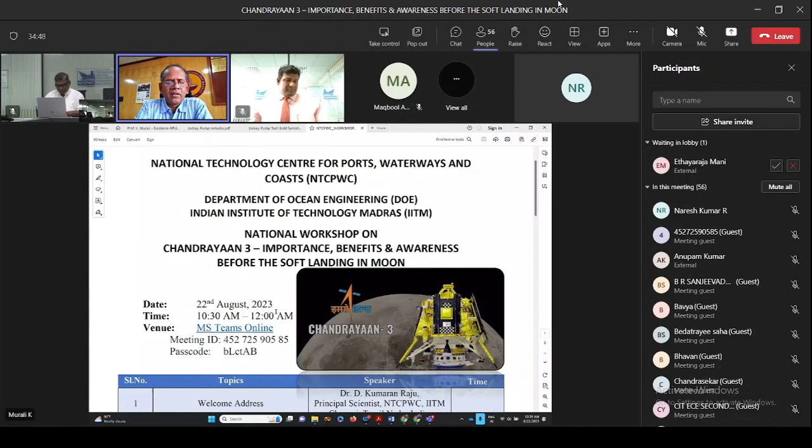We are collaborating in this effort with the Sagarmala program of the Ministry of Ports, Shipping and Waterways. We also thank the ministry and the Sagarmala team for having helped us organize this workshop on the occasion of the Chandrayaan 3 landing on the moon.

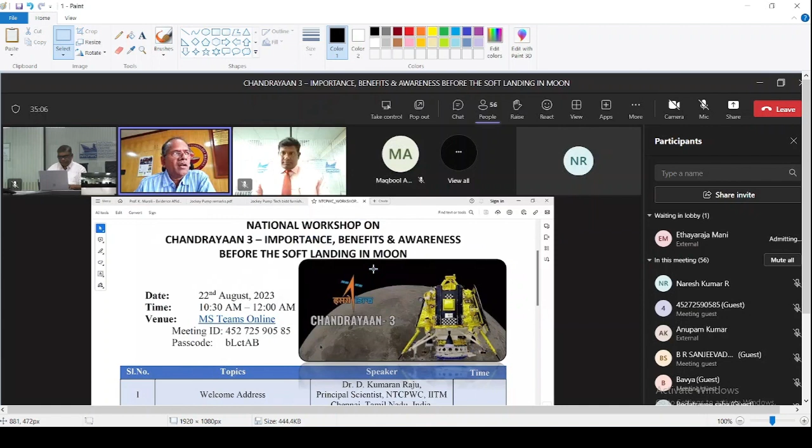There has been very little research that has gone into the science of the moon as a celestial body, and therefore we thought we would capture whatever research has gone into studying the celestial body in the country so far, along with information about the technological side of the program—the technologies directly involved, and those indirectly involved in this particular project and in further efforts.

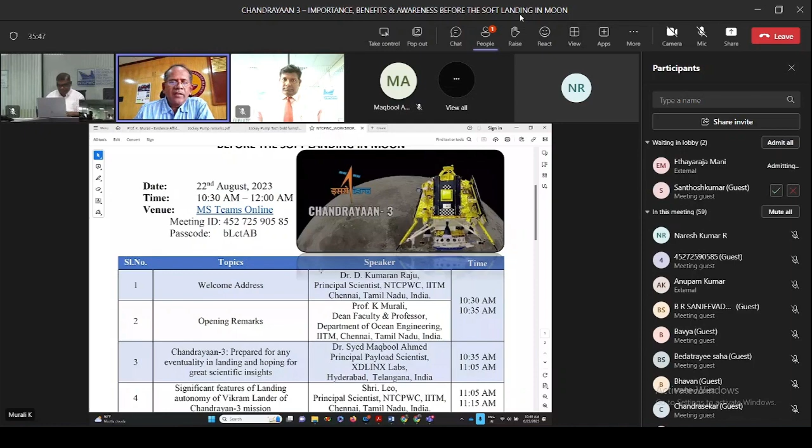In this context, we have invited three speakers. One is Dr. Syed Maqbool Ahmed, Principal Payload Scientist at XDLINX Labs, Hyderabad, Telangana, India. He will be talking about the Chandrayaan 3 project, the preparations they have done for any eventuality in landing, and the hope for great scientific insights. This is the topic on which he is going to deliberate.

We will also hear from Mr. Leo, Principal Scientist, NTCPWC, IIT Madras, on the significant features and landing autonomy of the Vikram lander of the Chandrayaan 3 mission. We will then hear from Professor K. Muthukkumaran, Department of Civil Engineering, NIT Trichy, Tamil Nadu, who has been instrumental in carrying out key projects on the geology and structural aspects of the celestial body. He will talk on lunar soil simulant for Chandrayaan missions, covering rover-soil interaction and the geotechnical properties and aspects relating to strength and stability.

With that, we will be winding up this program at around 12 o'clock.

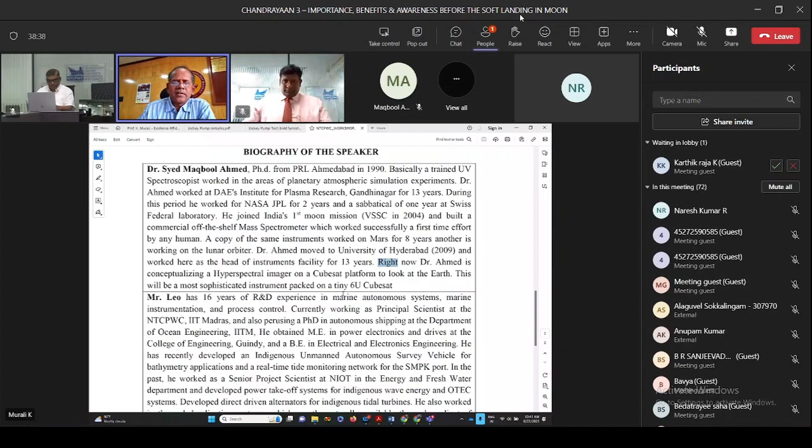A brief introduction about Mr. Leo. Mr. Leo has 16 years of R&D experience in marine autonomous systems, marine instrumentation, and process control. Currently working as a principal scientist at NTCPWC IIT Madras, and also pursuing his PhD in autonomous shipping at the Department of Ocean Engineering, IIT Madras. He obtained his ME in Power Electronics and Drives at the College of Engineering Guindy, and BE in Electrical and Electronics Engineering.

He has recently developed an indigenous unmanned autonomous survey vehicle for bathymetry applications and other surveillance applications in various water bodies. In the past, he worked as a senior project scientist at NIOT in the Energy and Freshwater Group, and developed power takeoff systems for indigenous wave energy and OTEC systems. He has also developed direct driven alternators for indigenous tidal turbines.

He has also worked in thermal desalination systems, which use naturally available thermal energy in order to produce clean water. He has a patent granted in desalination, and 3 published patents in autonomous survey vessels, hydrokinetic turbines, and wave-powered navigation buoys.

Finally, we will be hearing from Professor Muthukkumaran. Professor Muthukkumaran is currently a BA Chair Professor at National Institute of Technology, Tiruchirappalli, India. He obtained a PhD in Soil Structure Interaction and Marine Geotechnical Engineering from the Department of Ocean Engineering, IIT Madras. He has published more than 200 papers in international and national journals and conferences.

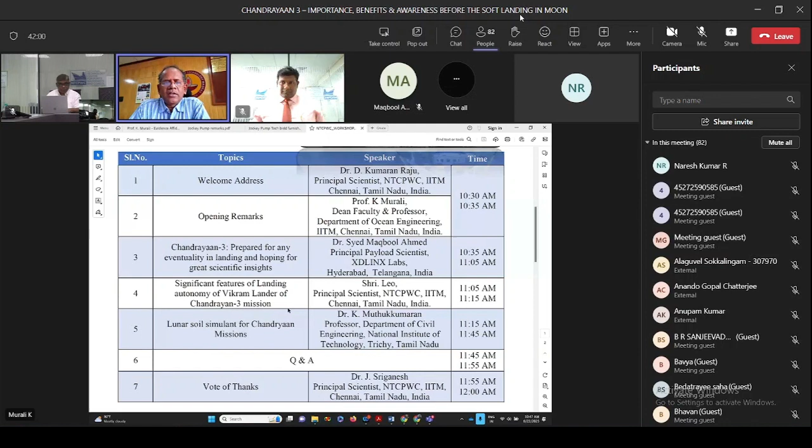I introduce all the speakers upfront because this sets the context that we have the most relevant speakers in this part of the country for this particular workshop, and we are very happy and honored to have them here. So we will start with the first presentation from Dr. Syed Maqbool Ahmed on Chandrayaan 3, prepared for any eventuality in landing and hoping for great scientific insights. Dr. Ahmed, please take over from here.

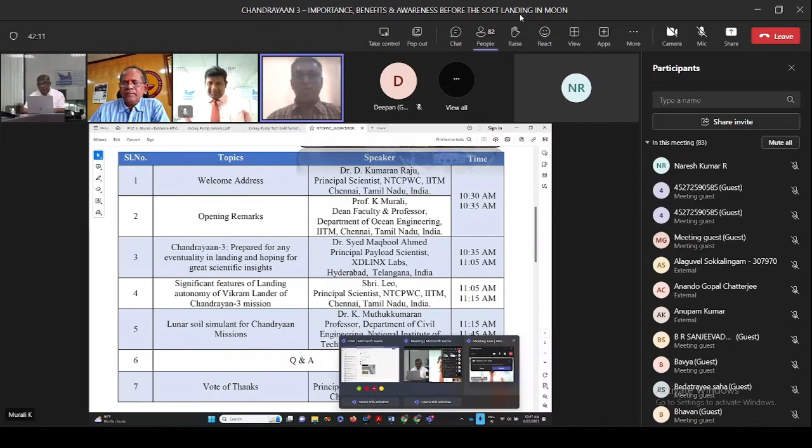Thank you, Professor Murali. I would like to thank the organizers, IIT Madras, and especially Dr. Sriganesh, because of whom I have come to this platform. This is a great opportunity to interact with people from various walks of life. I'm really excited and I really look forward to giving this lecture. I have roughly around 20 to 25 slides, and I expect to finish them within half an hour. I would be very happy to answer any questions after my presentation.

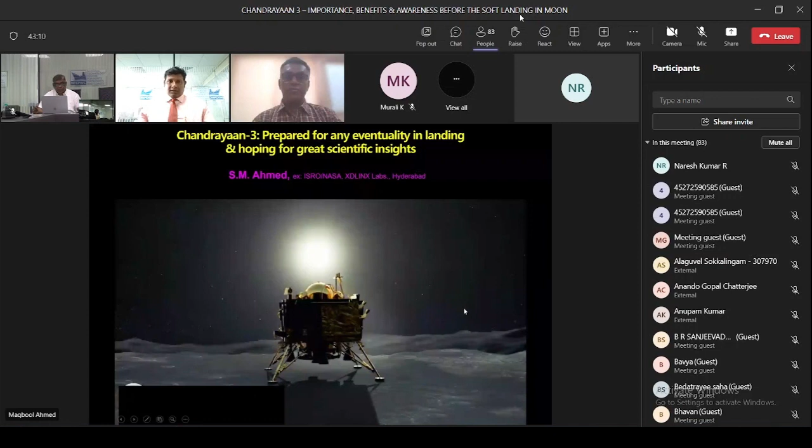So if you permit me to share my screen, I would go ahead and share my screen. I'm doing it, thank you, and it's coming up. I go here, yeah, it's here, and hope it's... is my screen seen? Yes, it's visible, sir. Please go ahead. Okay, thank you, sure.

So roughly what I plan to do is spend most of the time on Chandrayaan 3, in particular the landing aspect. A couple of 4 to 5 slides will be about how uniquely Chandrayaan 3 the people at ISRO have prepared for any eventuality, as I use the phrase, and that's what the chairman of ISRO has mentioned.

So most of my presentation, that is almost 50 to 70%, is based on Mr. Somanath's presentation, his lectures in the past 1 month. He has gone on record to give an extraordinarily clear-cut explanation about how exactly we are going to land.

And of course, the later part would be my part, where being an instrument scientist and having worked in Chandrayaan 1, I would speak about what these instruments are capable of.

So let's start off. This is the GSLV Mark III in a new avatar. They are calling it Launch Vehicle Mark III, M4 is the version. No point in going into the details of the rocket, but I would just like to touch upon a couple of aspects. The first few slides are kind of a popular level for the very young students who have joined.

The press called it Bahubali. This is one of the very powerful rockets, GSLV Mark III. And this, please don't worry about 11.2, this is the escape velocity. It will go maybe around 4 to 5 kilometers per second in very little amount of time.

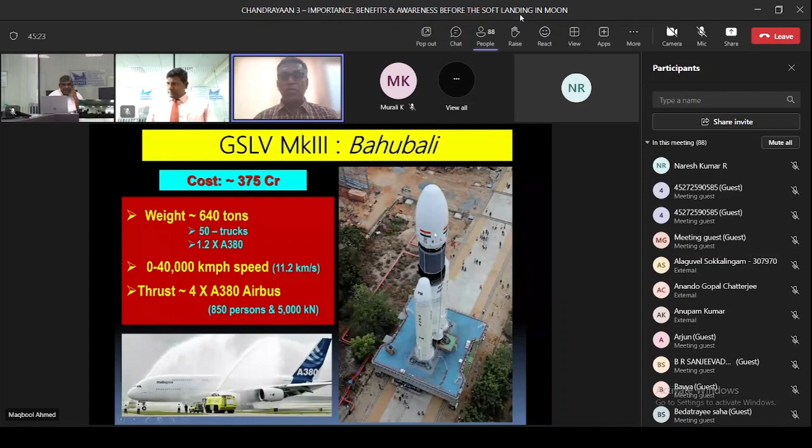It stands almost 11 to 10 stories tall. Look at the perspective, I just counted the floors, it really goes up all the way. That needs to be pushed right into the atmosphere, put in proper orbit and all. It's a huge, humongous task on the part of rocket scientists in ISRO.

But I would not touch upon these. I just like to show you the nose cone, which is actually carrying the spacecraft itself, so large, 4 to 5 stories tall. You assemble everything together and you expect it to go into a perfect, what they call a textbook launch. It requires enormous amount of experience and hardships, and if anything, one particular connector goes bad, your mission is all finished. Just one connector.

They have a few thousand connectors. They have a few kilometers length of cables. So anyway, that's a huge task.

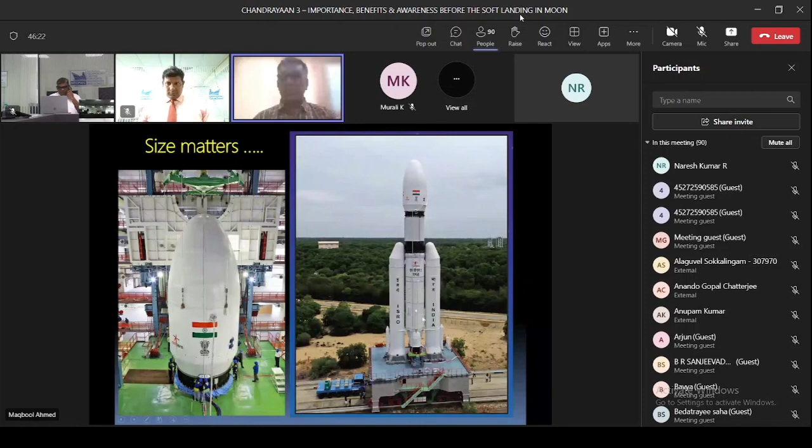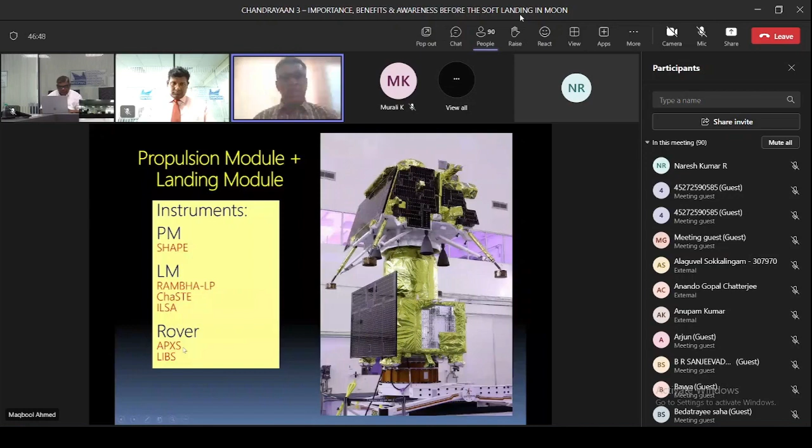So this is all what actually is left for the Moon, which is a propulsion module carrying the landing module. So these are the instruments. I'll come back to the propulsion module, which has one instrument, one payload, and the landing module has got 3 or 4 instruments, and the rover, which is in the belly of the landing module, the Pragyan rover, has 2 instruments. I would touch upon this in the last part of my presentation.

Now, everywhere at the bottom I have given credit to Mr. Somnath, chairman of ISRO, since the slides are all from his presentation. He has gone into extreme details. I don't want to go into the extreme details, even though I have understood them. I can really discuss, but since I've got to finish everything in half an hour.

So the actual mantra, since I'm talking to the people at IIT Madras, is guidance, navigation, control - the GNC, which is a solid amount of work that's going to work tomorrow. So what they are going to do is they have come up with a fantastic guidance algorithm. Before you pay attention to this table, please ignore this.

So in a very smiling way the chairman said that this time we are not trying to land successfully. Please listen to this phrase - he said we are not trying to land successfully. Our mantra is to rule out, to mitigate every failure mode, and that's a huge task. What the chairman is saying is that last time we tried to land successfully and they landed in trouble. Maybe later at the end of the presentation, if somebody asks the question, I'll tell you - if you try to land successfully, you can ask for trouble. Whereas solving every possible failure mode requires an enormous amount of hardship, and they have gone through it.

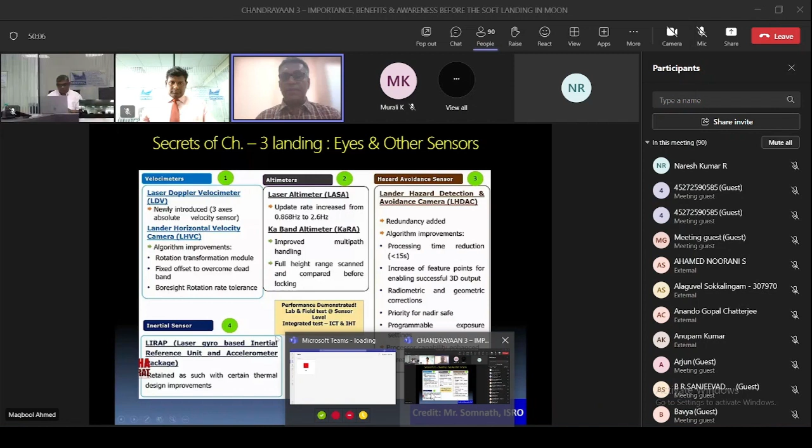Now, I wish I could go into the details of all this. I would not bore you with it all, but I want to impress upon you the amount of sensors they have plugged in. They have laser Doppler velocity meters, altimeters. In Chandrayaan 2 also we had both laser-based and Ka-band based systems - various types, this is a kind of redundancy.

If something doesn't work, they make sure there is correlation checked between systems, so that if something fails, the other one works as a backup. In the hazard avoidance sensor, they have a huge amount of cameras - not one, more than one - and a huge number of program modes where they process and make sure the path they're following is correct and will take them to the given target.

And then inertial sensors - they have this fantastic laser gyro-based inertial reference unit and accelerometer package, which has 3 to 4 sensors, state of the art. It's all built in, and these are part of the landing module - the eyes and other sensors in the landing module tomorrow.

So just to tell you what exactly the mission is: you follow the real-time guidance bound check, make sure everything is going smoothly in real time. If any violation takes place, let it take place - you deviate, and that leads to real-time retargeting. So don't worry about the target you're going after, go for another retargeting.

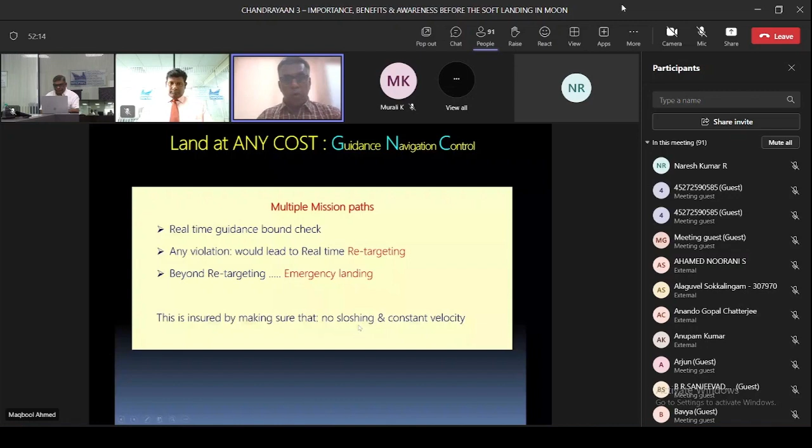Yeah, a little bit more - I hope I'm not boring you too much, but these are absolutely the numbers and actual spot-on issues which they have addressed, and they have made sure this will work as compared to Chandrayaan 2.

As I told you, the mantra is to mitigate expected failures, not just to land successfully - don't worry about landing at the precise spot. Instead of a half-kilometer by half-kilometer target last time, which ran into problems, now they've gone for a better strip, which is 4 kilometers long and 2.5 kilometers wide. Not one, there are 3 strips they have identified, so this is much easier - just like a huge military transport aircraft, like an Ilyushin 76, that can go and happily land.

It is a sequence to tackle, as I told you - sensor failure, engine failure, algorithm failure, and calculation failure. These are the phrases I used from the presentation of the chairman himself, not my own phrases. So it's all there - land anywhere instead of at a single spot. A huge addition has been made - they've added one more extra camera, and one extra antenna to make sure communication takes place in a robust way.

Lots of solar panels, additional solar panels all around the lander, so that even if the landing takes place in an odd way, you are facing the sun and extracting good amount of energy to make your experiments go. And Doppler velocity monitor, a very crucial sensor, just to make sure constant velocity, and if everything else fails, the DVM will take you happily to the spot of your choice.

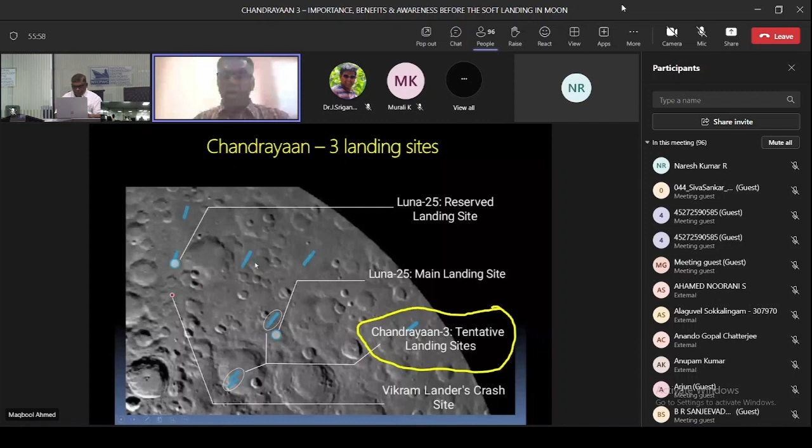Now, a crucial test they did. So I'm almost 30% through my presentation. I've got another 8 slides.

So the crucial cold and hot test they did, following ISRO's mantra - what is that? Seeing is believing. They said, sir, we will do the test, sir, then only we will say that things are working. What is it? Cold test. They assembled the whole Vikram and took it in a chopper, and all those 9 sensors I told you, all of them are put to use. Let's see whether the velocity meters, altimeters, camera - they are all working.

Is the camera trying hazard avoidance detection and taking it to safer places? Camera working? Yes, the camera is working. Altimeters, all the altimeters were tested. I'll show you the pictures also, which the chairman showed.

Hot test. What they did was, from a huge crane, they let the Vikram lander actually come down and simulated the weight also, which is 1/6 of what it is on the surface of Earth. And they made sure that the engines are firing beautifully well.

So this is like I give you a racing horse. Now the question is, can you control the racing horse? That's very important. 740 newtons is a huge propulsion engine. So they made sure that the propulsion is very, very nimble. It's like a very powerful horse, but it's listening to all your controls. They're throttleable, so that is your control, which is the leash in your hand.

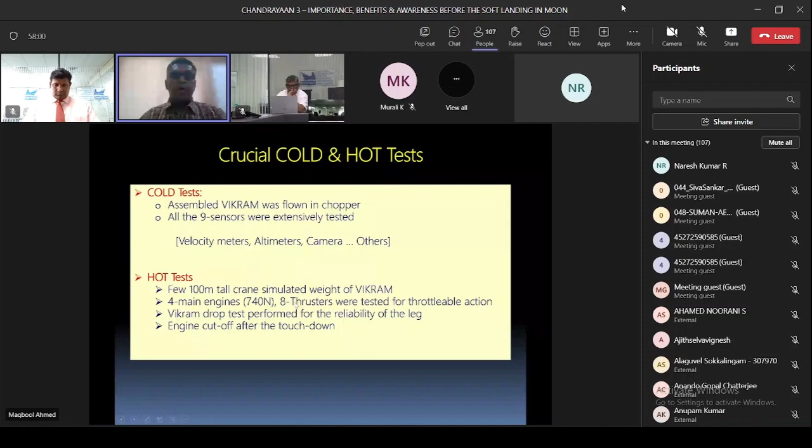So ILSA is actually a moonquake measuring 3-axis accelerometer with excellent resolution of 10 nano G. The G value, gravitational pull of the Earth, almost 10 raised to minus 9, minus 7 G resolution. Fantastic, built right here in India, starting from scratch.

And RAMBHA is electron density, or the charge, the dust which was actually caught on the astronauts and all in the Apollo mission. They wanted to check in a region of almost 25 picoamperes equivalent current to 25 microamperes current. They also want to see how this dust charging is taking place as the sun rises and as the sun sets. First time, nobody has ever tried, and ISRO has.

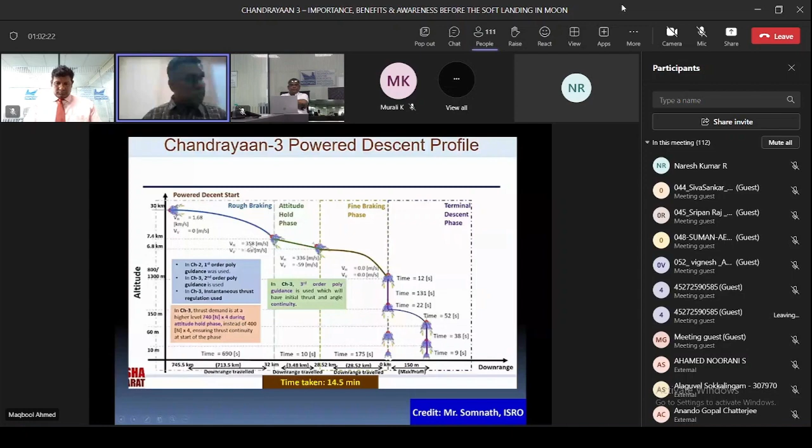ending in 11 minutes or so, 690 seconds. They will end up with a velocity which is again reasonably high, which I've calculated at 1,300 kilometers per hour. Now again they hold the altitude hold phase. They make sure that it will not stumble, but still try to retrofire and bring down the speed from 1,300 to almost 200 kilometers per hour at this stage. So from here it is again almost retrofiring.

Then from horizontal, by virtue of thrusters, they will make sure that it is vertically above the lunar surface. Then it will have a lot of fuel to nicely hover for these many seconds, happily make sure that it looks for that nice strip and moves around from point A to B to C, and then lands on that beautiful 4 kilometers by 2.4 kilometers strip.

And all the details which I explain, all of them are there. Plan A, plan B, plan C. Plan C fails, close your eyes, happily go and land here. That is what is going to take place. And imagine how terrible is the place where Chandrayaan 2 tried to land. We are going to land somewhere here only, which I showed you there. So it's just like the eagles are daring to land there.

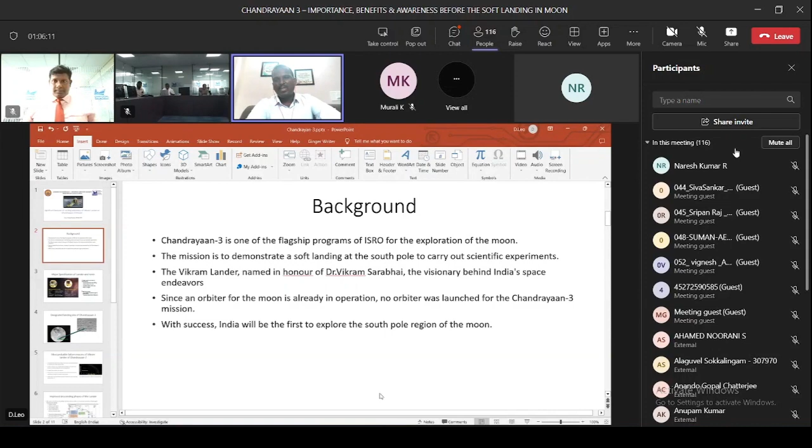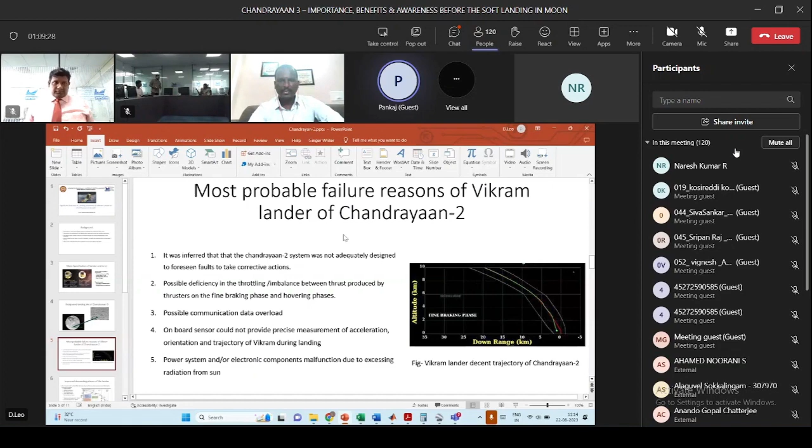So now I'm sharing the screen. The Chandrayaan 2's power system and its electronic components malfunctioned due to excessive radiation from the sun.

So the improvisation taken in the next mission: after descent orbit insertion (DOI), the below phases will be executed autonomously on finalizing the trajectory for landing. There are multiple descending phases: rough braking, altitude hold phase (hovering), fine braking phase, and the touchdown phase, which is the terminal descent phase.

The total descending duration is less than 15 minutes. The horizontal distance during the descending operation is approximately 750 kilometers. The descending altitude was initially 30 kilometers, but we recently achieved 25 kilometers.

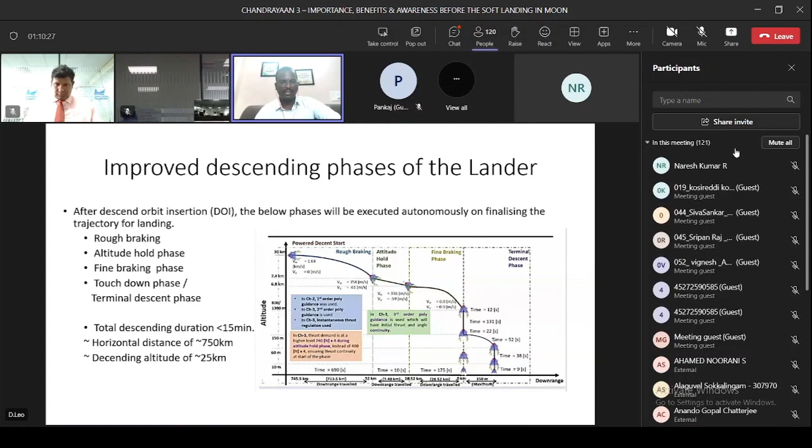So it has to reduce its altitude from 25 kilometers.

So the improved features on the Chandrayaan 3 lander include a terrain relative navigation system that uses onboard cameras. There are multiple cameras, already explained by the first presenter, and lasers to map the landing area before descending. This also helps identify obstacles.

The earlier mission, Chandrayaan 2, had first order poly guidance. Now it has been improvised to second order poly guidance that uses terrain relative navigation data to guide the lander to a safer landing spot.

This now has indigenous thrust regulation—instantaneous thrust regulation—so it can take much faster regulations in the thrust.

It is possible now. A backup landing system: if the primary landing system fails due to unforeseen situations, then the backup landing system present in the lander will take charge. Also, increased fuel capacity.

So at present we have a good amount of fuel to take up multiple attempts during the descending. We have now reinforced landing legs to protect the lander from damage.

These are all the lessons we have learned from the Chandrayaan 2 mission. So most of the improvisations are learned from the past mission.

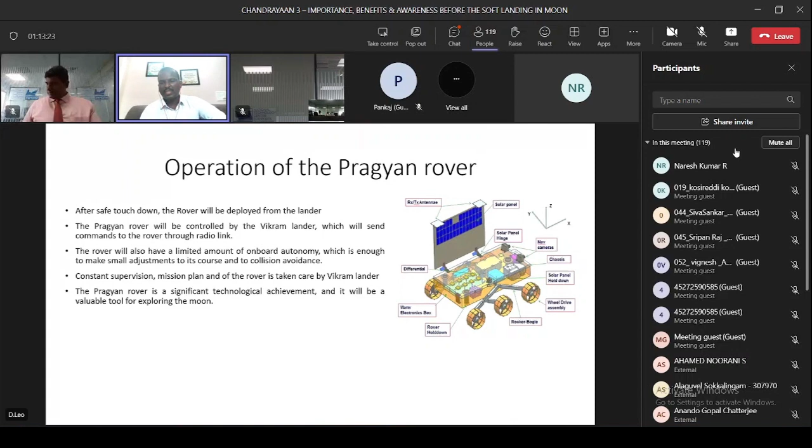The constant supervision and mission plan of the rover is taken care of by the Vikram lander. The Pragyan rover is a significant technological achievement and will be a valuable tool for exploring the moon, with a good amount of sensor payload for scientific exploration once deployed.

In conclusion, the lander is scheduled to touch down tomorrow at 6:04 p.m. Let's hope to celebrate its successful touchdown together. Thank you. Jai Hind.

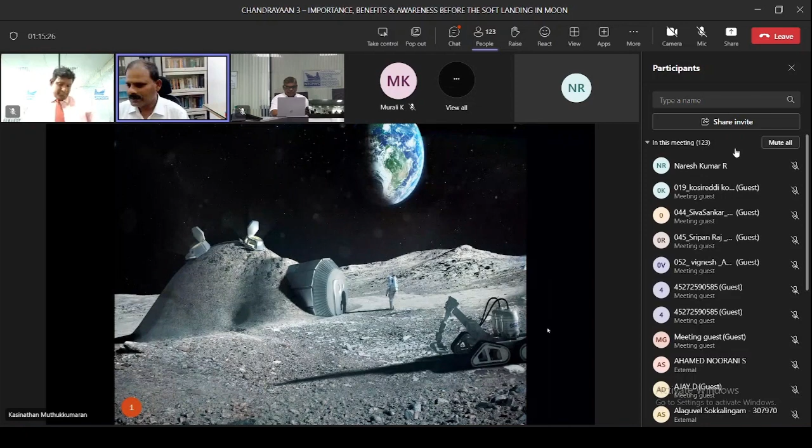At the outset, I really thank IIT Madras for giving me this opportunity. We have been working on the Chandrayaan mission for the past 13 years, so to cover the entire research work we did in the last 13 years in 30 minutes, I will nevertheless try to focus completely on a few important aspects related to lunar soil simulant and lunar structures.

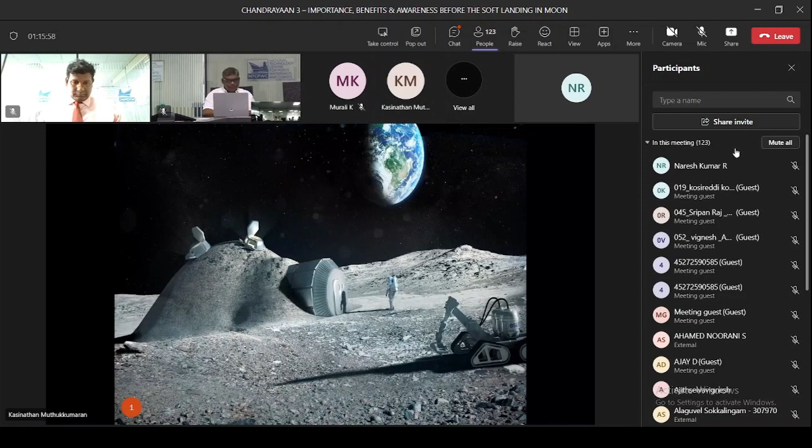So my topic is lunar soil characterization and design of lunar structure for Chandrayaan missions. I'm Professor Muthukkumaran from NIT Trichy.

As the earlier speakers talked about the importance of the Chandrayaan mission, I'll briefly discuss my role in this mission, especially on lunar soil simulant and lunar structure. I won't touch much on the interaction problem and structural aspects of lunar habitation. As we all know, ISRO has already done Chandrayaan mission 1 and 2, and we are expecting very good news tomorrow evening for the third mission, and many more to come in the near future. There are several aspects related to this Chandrayaan mission.

The foremost one we have considered is interplanetary missions, where the Moon will be taken as a transit place, as you can see in the first figure. So the Moon will act as a transit place for interplanetary missions, where the Chandrayaan mission has huge potential to explore the Moon's surface and further develop Moon habitations, as well as serve as a launching pad for futuristic missions to other planets.

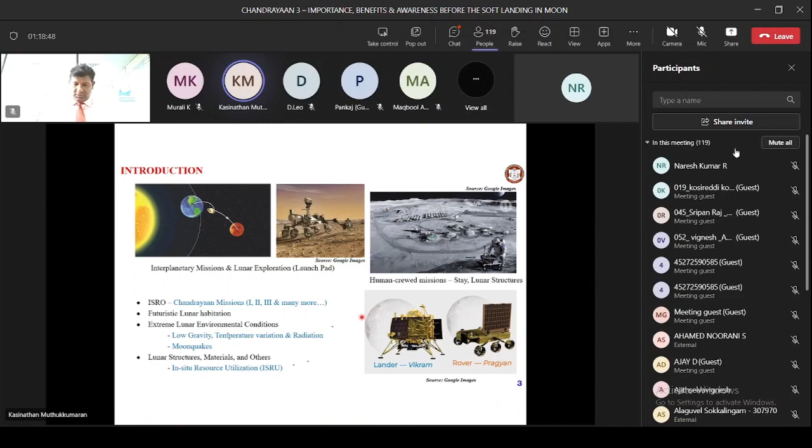We also have problems related to materials for building a lunar structure. The foremost task for the Chandrayaan 3 mission is how to utilize in-situ resources for building such lunar structures on the Moon's surface. These are the major objectives of the present mission.

Coming to past missions, as we all know, Luna and Apollo. A few days back we heard about Luna 25, and Apollo is another mission from the USA. These are well-established missions that happened over a few decades. Luna's 25th mission and Apollo's 17th mission have already been sent. So we are on the right track, and in fact we are doing much better than these two established missions of Luna and Apollo.

In order to carry out this interaction study, stability analysis, and assess the possibility of constructing a lunar structure in the lunar environment, we need to artificially create a lunar soil simulant. Many countries have already simulated such simulants using rocks, ash, silt, sand, and mineral splashes. We have also tried our level best to create a lunar soil simulant that will be almost equivalent to the lunar surface, as you can see here.

This is the one we developed, LSS ISAC 1, which almost resembles the actual lunar condition, especially in the highland. The lunar surface is basically divided into two zones: highland and mare land zones. We intend to get our lander and rover mobility mainly on the highland side. So we have developed a simulant using anorthosite rock minerals, basically for lander and rover stability and moon habitation related aspects. We have also extended studies on the dynamic characteristics of lunar soil, because the Moon is subject to huge moonquakes.

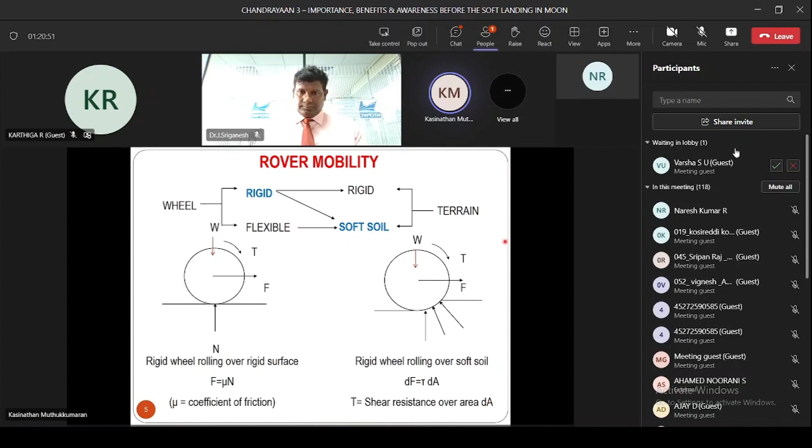Let me briefly explain the concept of wheel-soil interaction. This has two components: the first is rigid terrain, the second is flexible terrain. Rigid terrain is like our current road construction, where the road is taken as a rigid body and the wheel, whether flexible or rigid, is mostly taken as a rigid wheel.

Whereas in the case of rover movement on the Moon's surface, this is considered differently, because the surface of the Moon has very soft material acting as a more flexible medium, while the wheel acts as a rigid medium. In this interaction, the response is purely governed by the sinkage potential of the soil material. Specifically, how much the lunar soil sinks with respect to the applied load is what decides the interaction effect, and that in turn decides the drag force we need to apply on the rover. So the rover design is completely governed by the characteristics of the subsoil, that is, the moon soil.

So lunar soil simulation is very important to consider wheel-soil interaction. Basically, the interaction occurs through this area — how much it settles down or sinks into the surface of the moon soil.

So based on that, the study has to be extended. This is the basic principle: the rover mobility is basically a rigid body resting on soft soil, and the movement is happening on the soil. So this is simple physics.

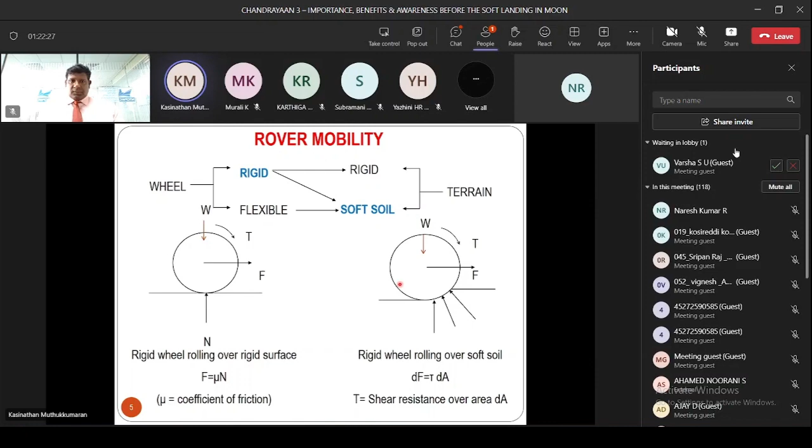Under static condition, the expected resistance of mobilization is uniform. But when talking about mobility, the traction forces keep changing with respect to the response of the soil. The moon soil characteristics may not be same throughout the moon surface, and there will be huge variability. This variability is considered in the rover mobility study, which aims to design a proper wheel-soil interaction considering the sinkage potential of the lunar soil.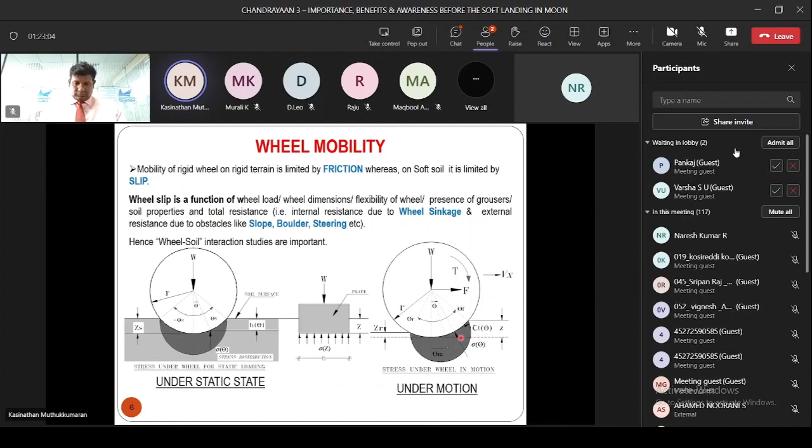The actual lunar soil is a monophase system, not like the three-phase system we deal with on Earth. So it is completely taken as a single soil system. Considering the conventional soil mechanics principle may not be directly applicable to the moon soil interaction study, so mainly the study is extended with terrain mechanics principles.

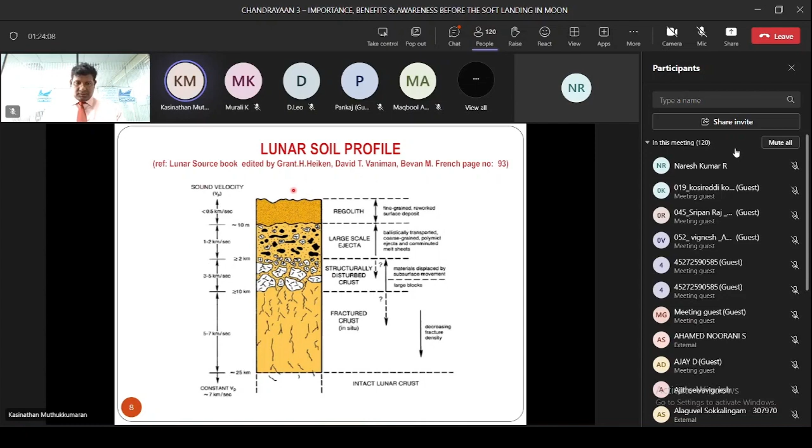for any lunar habitation. So this soil is basically very soft in nature. We have a lot of difficulties and challenges to design the soil characteristics in such a way that it can be considered in the actual rover mobility study.

Looking at the grain size distribution, the size of the lunar surface particles is always less than 1,000 microns, and majority comes under 140 microns sieve size. It's predominantly fine grain and fine silt particles. In the absence of water, the mobilization of cohesive resistance in the soil is almost insignificant, and predominantly the soil strength is governed by frictional resistance.

The Apollo mission brought out almost 400 kg of regolith sample that will be taken as benchmark results for our analysis, especially the Apollo 16 core sample. Based on this Apollo 16 return sample, lunar soil simulants are being prepared, validated with various engineering and physical characteristics. These are the properties given by the Apollo 16 mission.

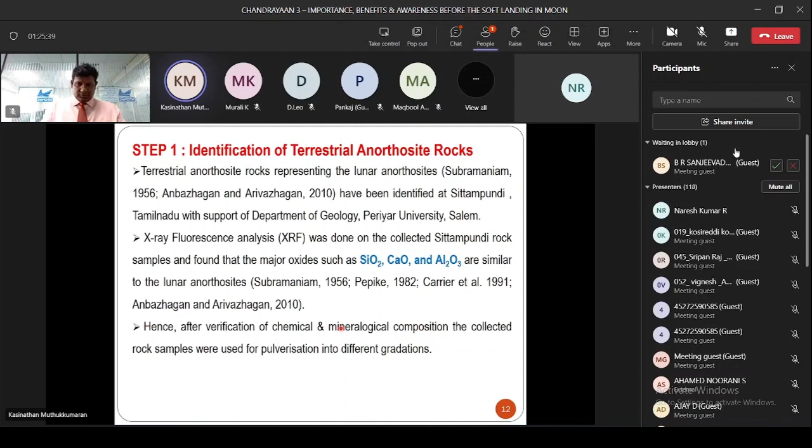The first and foremost task is to map these engineering characteristics such that the soil will resemble the lunar ground. So it was decided to go for a highland soil simulant with the help of ISRO. This is the first identification of anorthosite rock locations.

It is Periyar University, under Professor's leadership, that identified this. The identification is mapped in terms of mineral as well as chemical composition of the material, and it has been very well mapped with all the engineering characteristics.

So the place is called Sittampundi near Salem. It was identified where the outcrop unearthed rock minerals are.

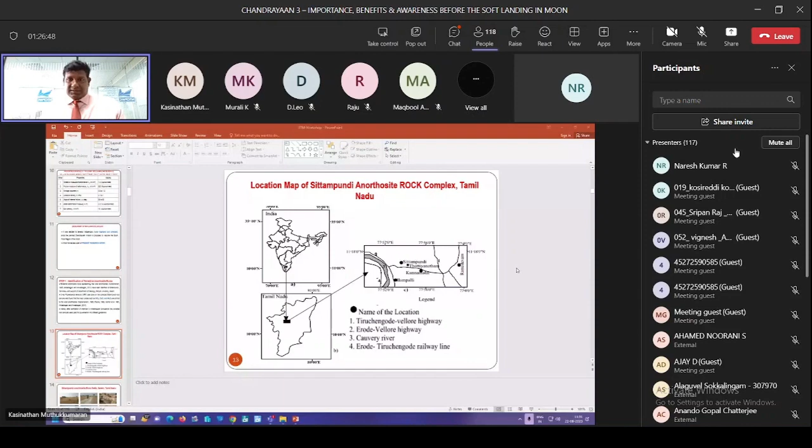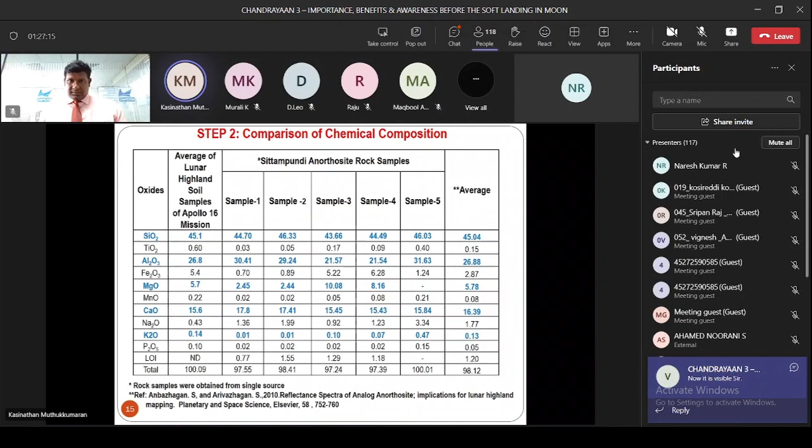So this is identification of the outcrop rock. It was identified and decided to have different sizes in order to map the actual lunar simulant. We went with five simulants of various gradations, and the average was taken and mapped with the chemical as well as mineral composition of the rock.

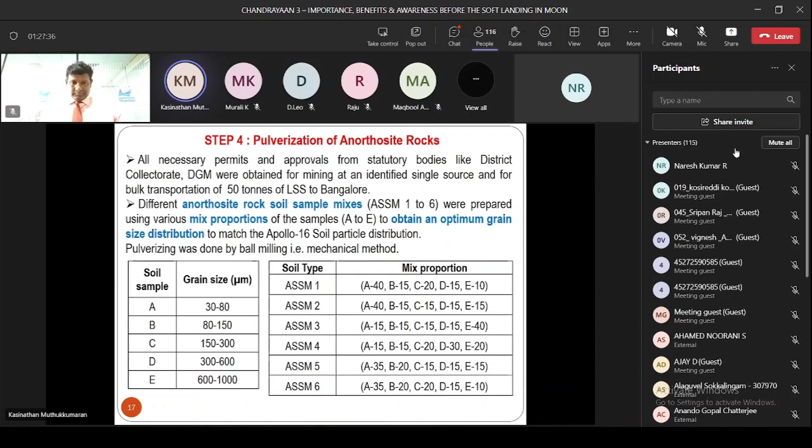These simulants have been further divided into various categories A, B, C, D, based on the percentage of fines, and accordingly these are analyzed in the laboratory for engineering characteristics. The pulverization process was done in Salem in a very quality-controlled manner.

All the tests were conducted as per the proper provisions, and all test results have been mapped with the lunar upper and lower limits. The one very close to the expected actual lunar sample has been picked up and further analyzed in the laboratory for various characteristics, including strength and physical characteristics.

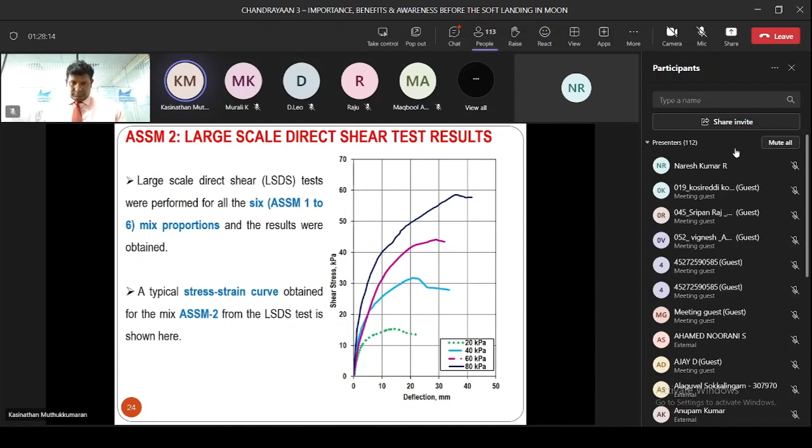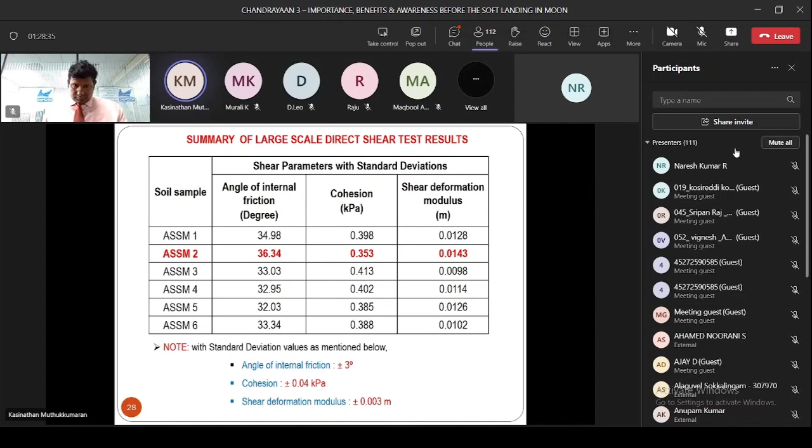So what you are seeing on the screen, I'm just moving faster because I want to go into more structural detail later. So this is how the complete analysis was done, and based on this analysis, we have come up with ASSM 2 giving properties very close to the Apollo 16 sample.

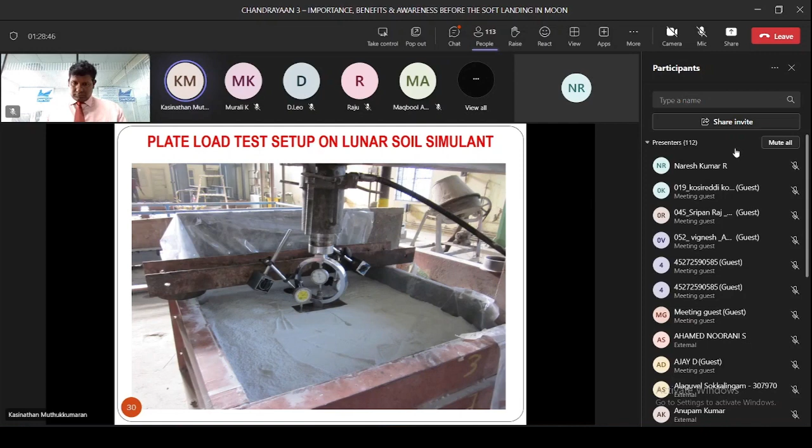So a further analysis was done to get the sinkage potential on the LSS developed envelope, for which we conducted several plate load tests. Based on the plate load test results, the deformation modulus and sinkage exponent were obtained using simple soil mechanics principles, and using that, all the other parameters were derived.

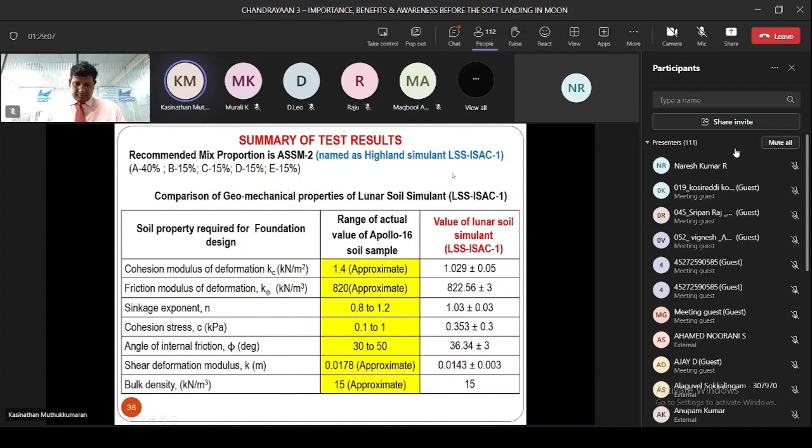So these are the final values we obtained with respect to the developed LSS ISAC-1, which almost resembles the actual lunar soil characteristics. Based on that, further characterization was done in terms of dynamic properties as well, using a cyclic triaxial apparatus for the cyclic analysis.

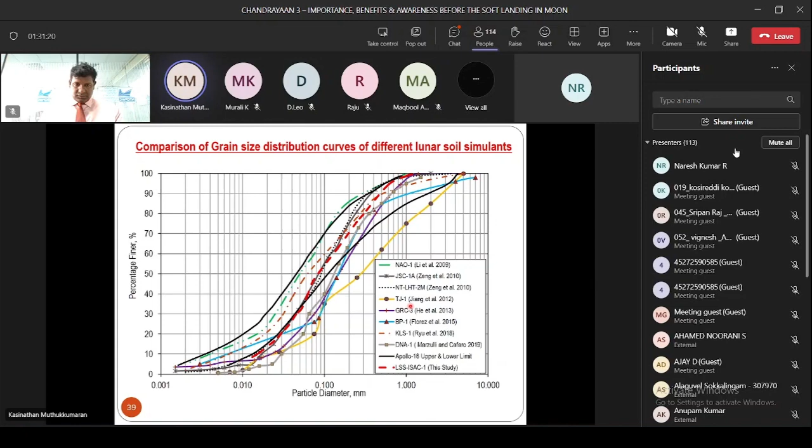That is why the engineering characteristics we obtained are much more similar to the actual lunar characteristics, as witnessed by the actual rover and lander stability tests in the ISRO laboratory.

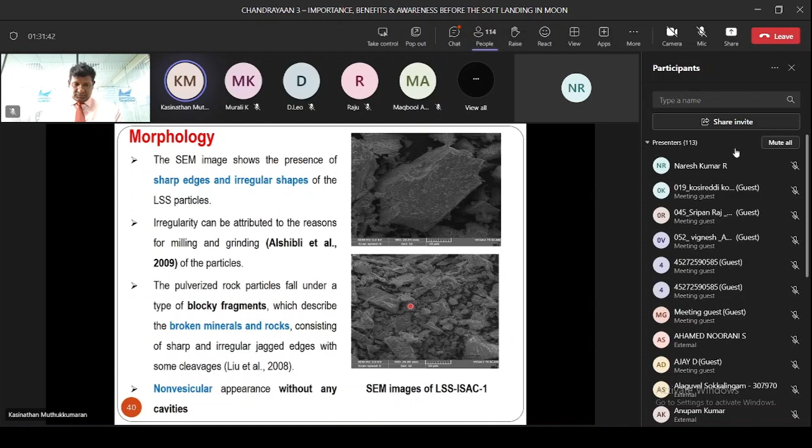We have also done the microstructural analysis of LSS ISAC-1, and it shows a non-vesicular structure without any cavities, showing very good strength characteristics consistent with all the other properties. Our simulant is much closer to the actual lunar material than any other simulant available elsewhere in the world.

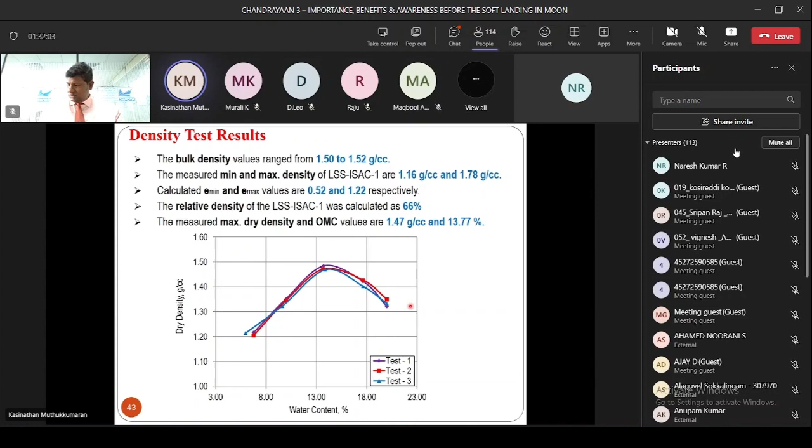So we have extended this study with relative density and strength characteristics using triaxial tests and consolidation characteristics. Though water is not available, during rover mobility the rover's weight can cause prolonged settlement on the lunar surface. In order to estimate this prolonged settlement, termed consolidation settlement on the lunar surface, the consolidation characteristics were also estimated in this laboratory.

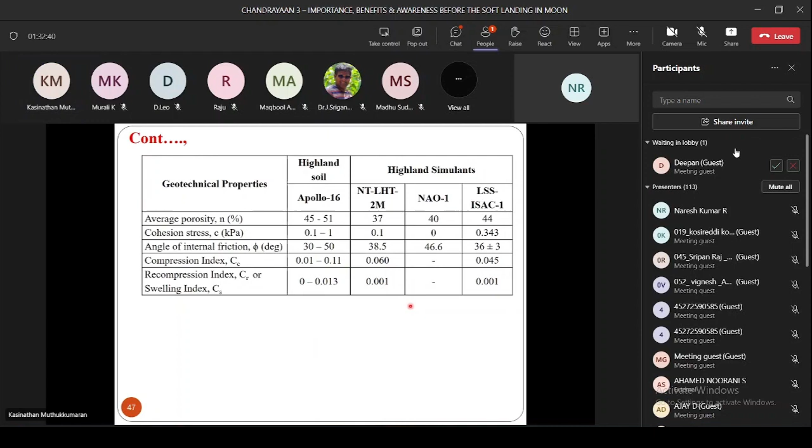Finally, our LSS ISAC-1 was compared with the so-called very popular LSS developed elsewhere in the world. This study was extended to the actual shear strength characteristics, which is a very important component when considering the mobility of the rover. So we considered the extreme conditions in the lunar environment.

The normal lunar terrain has a relative density close to 63%, which was taken as the actual condition for shear strength mobilization with respect to rover weight application and rover mobility. The other extreme is when the lunar surface is very soft, taken as 30% density, and when densified, taken as 80%.

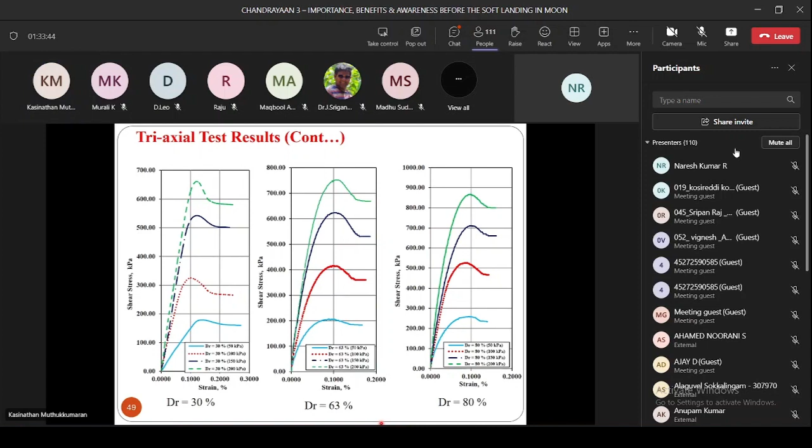So for various relative densities, with the application of confining pressure representing the pressure from the rover's weight, the shear mobilization taking place along the lunar surface was estimated using the triaxial apparatus, and this was estimated for various conditions.

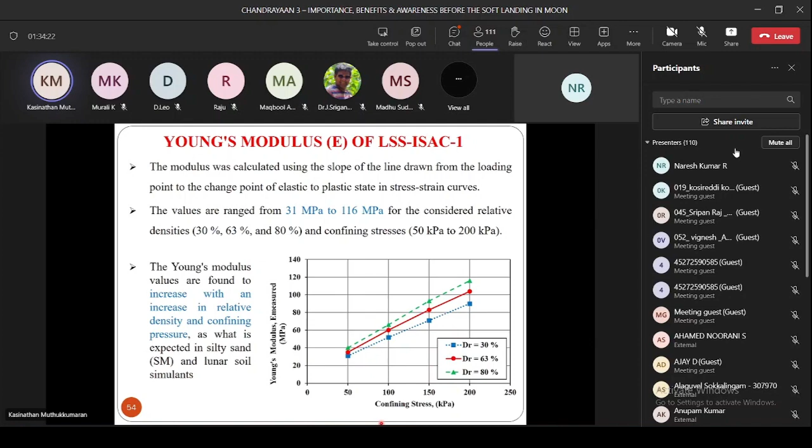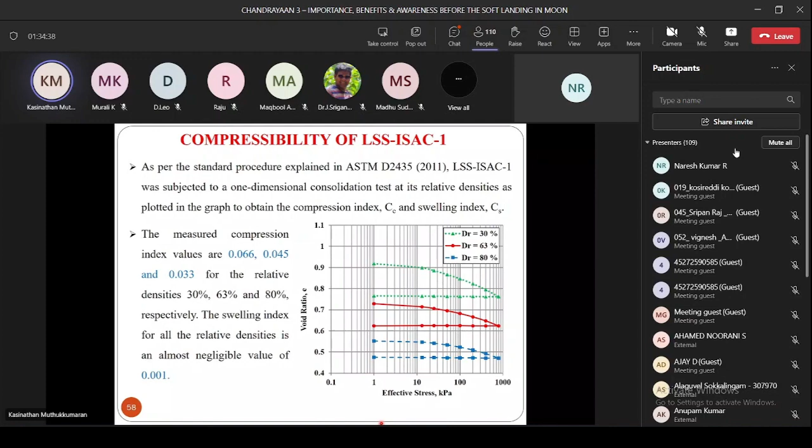The study is further extended with the Young's modulus analysis for the actual lunar structural study. We have developed a model for calculation of Young's modulus with respect to the lunar condition, considering the 1/6 reduction modulus. The other important aspect with respect to this study is considering the moonquake effect.

There are four kinds of moonquakes expected on the lunar surface. Deep moonquakes normally occur at more than 700 kilometer depth. Shallow depth moonquakes are about 20 to 30 kilometers. And there are thermal quakes, and moreover, quakes introduced by meteoroidal impact. The shallow moonquake and the meteoroidal impact quakes are very significant as far as the lunar structure is concerned.

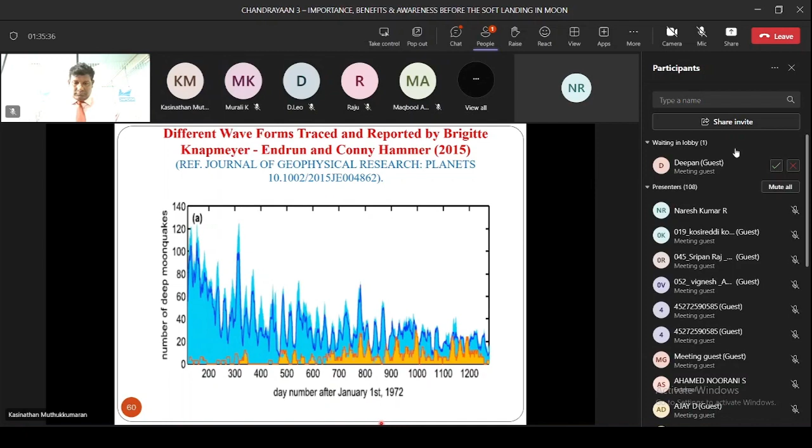Since there is almost no attenuation on the lunar surface, moonquakes keep ringing like a bell on the surface. This low attenuation level creates more issues for the lunar surface, so whenever we do construction there, we should also consider moonquake resistant structures. This is the history of these moonquakes reported by NASA.

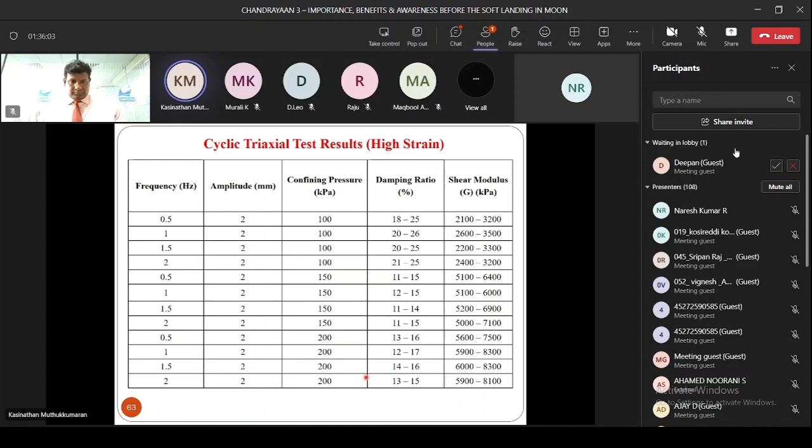The cyclic triaxial apparatus has been used to get the complete dynamic characteristics of the soil. This table gives the complete picture of the dynamic characteristics, shear modulus and damping ratio with respect to various frequency, considering various confining pressure. This confining pressure has been taken considering the foundation depth on the lunar surface. The Bender element test was also conducted to get the maximum shear modulus.

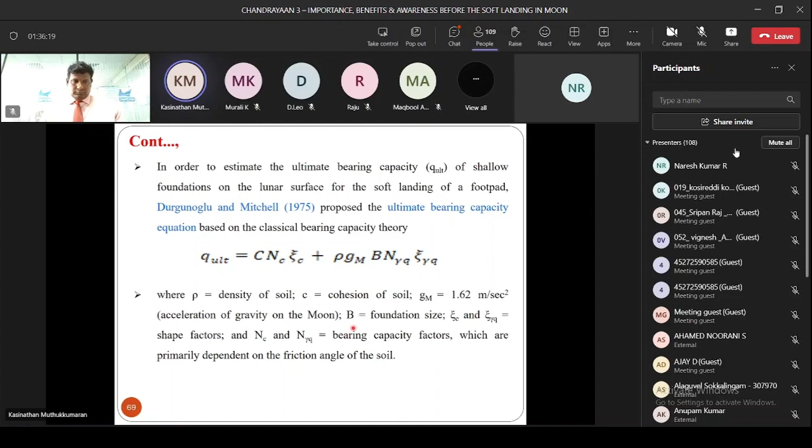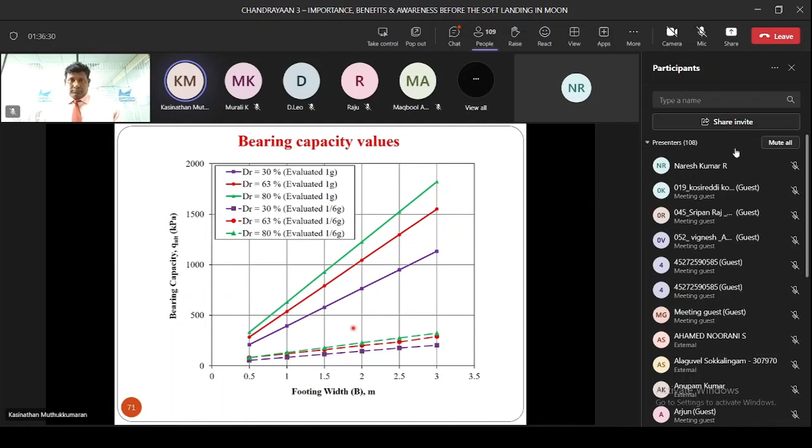Further, the study has been extended with bearing capacity analysis. The classical bearing capacity theory has been used, and bearing capacity was calculated for various 1G conditions as well as 1/6 G condition, for considered relative density 30 to 80. Based on that, bearing capacity equations have been developed.

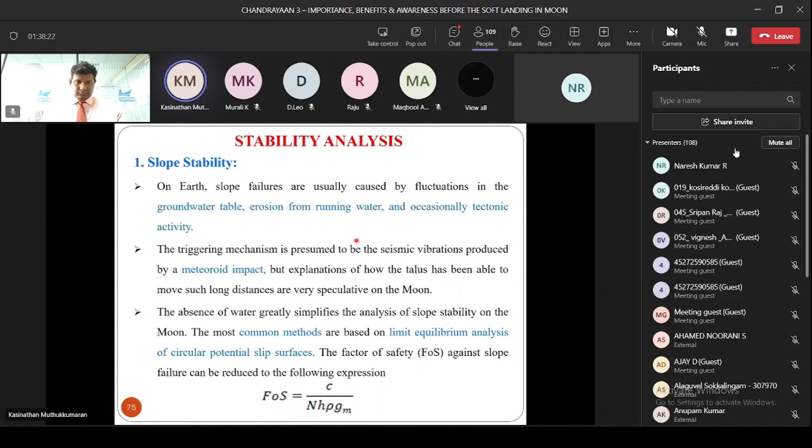Slope stability was also studied with LSS ISAC 1, especially for the self-standing height, which is very important for excavation. In the future we may need excavation on the lunar surface to build an igloo kind of structure, so what will be the expected excavation depth without any support? That comes under self-standing height. This was estimated in the laboratory and extrapolated to the actual prototype scale, showing that excavation can go up to 2 to 3 meters without any support.

The second important aspect of this study is developing building material using in-situ resources, because construction material cannot be transferred from Earth to Moon. Transferring 1 kg of construction material will cost about 15 lakhs per kg, so it is not easy to transport material from Earth to Moon.

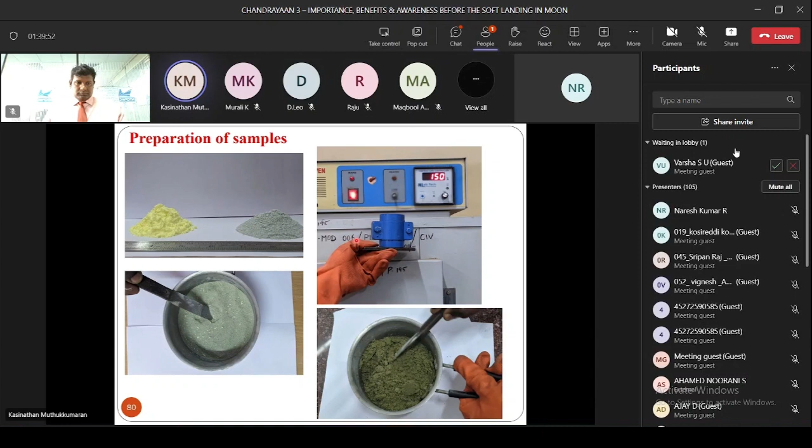So we need to find an alternative material using the internal resources available on the lunar surface, that could be used for construction building material. So that study we extended using sulfur as the binding material, because the lunar surface has an abundant amount of sulfur that can be extracted and utilized, and sintering techniques can be used to build a mold kind of structure. That is what we extended further towards the lunar structural component.

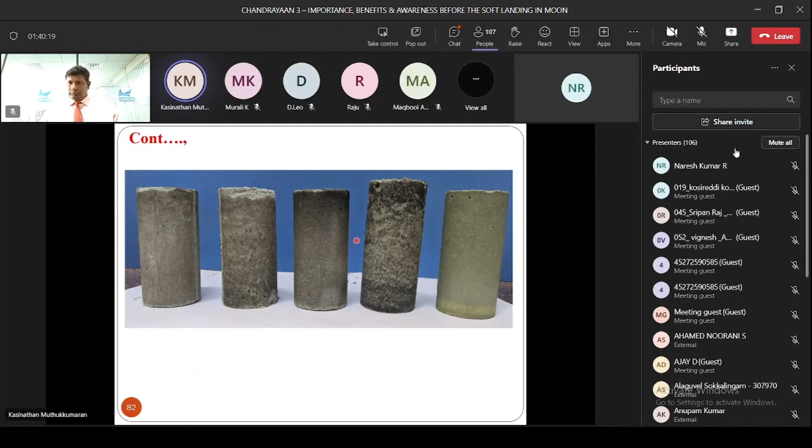So we used sulfur as the binding material, and it has been melted at the sulfur melting temperature close to 150 degrees centigrade, which is available on the lunar surface with its very hot temperature. So using the solar temperature itself, it can be melted and cast into required forms. This shows the complete formation of lunar blocks using sulfur.

It's about 14 Earth days. So the complete cycle has been studied with respect to temperature variation and strength degradation of the material. That has shown a very clear picture that the developed sulfur-content-stabilized lunar blocks have very low strength degradation, in terms of weight loss, just 3 to 3.5 grams, considering about 720 to 750 grams of weight.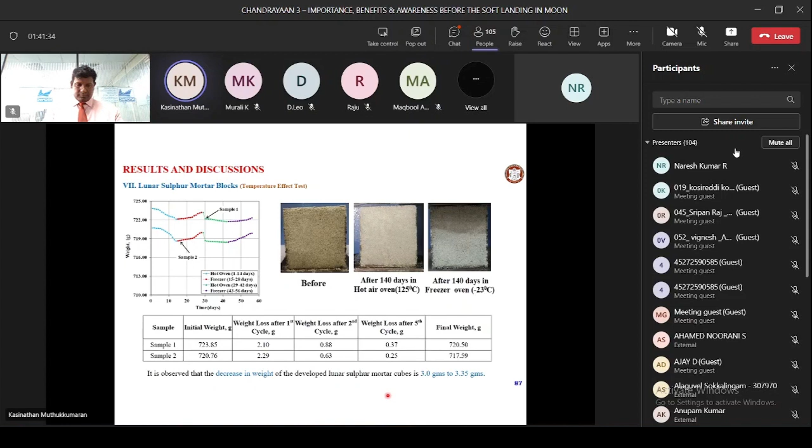So as a whole, if we are planning to build a structure on the moon to have lunar habitation, of course it will be done maybe in another couple of decades, because the moon will be taken as an interplanetary point, acting as a transit place for other planetary missions. So astronauts have to stay on the moon, and for that we need to build lunar habitations, lunar structures.

So as we all know, the moon has complete vacuum, no atmospheric air. So in order to have a comfortable living atmosphere, we need to create a living atmosphere and build a structure. So essentially, the structure is subjected to applied force, where we are creating atmospheric pressure in the chamber. So the structure is subjected to applied pressure.

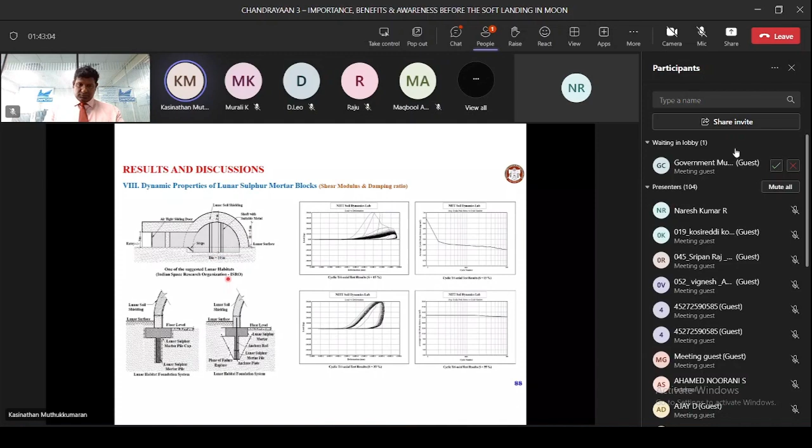In order to counteract the applied pressure, we can either have a self-standing structure where the structural thickness is increased so that the force reaches an equilibrium state - and for such thickness we may need to spend more money and time to build a thick solidified structure - or rather, we can keep the structure thin and provide a foundation system such that the foundation system is subjected to uplift. That is the concept we have developed related to lunar habitation.

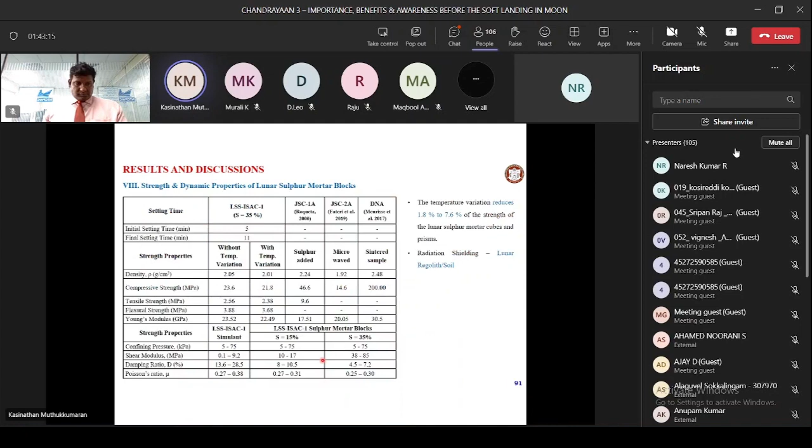This is the complete dynamic characteristics of the developed sulphur mortar with respect to the actual dynamic response, considering the moonquake effect. I'll just move on with a few more slides related to the structures we have considered.

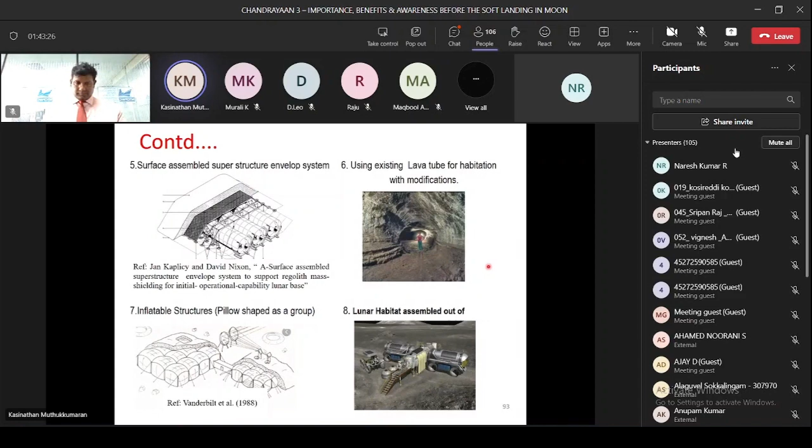There are different configurations developed elsewhere in the world, and ISRO also identified a certain kind of structural composition. This is one conceptual layout plan for the lunar habitation. Partly the structure will be buried below the lunar surface, and partly it will be shaped as an igloo kind of structure at the surface. It's a well-known fact that with a dome kind of structure, the structural stability is much higher than other kinds of structures.

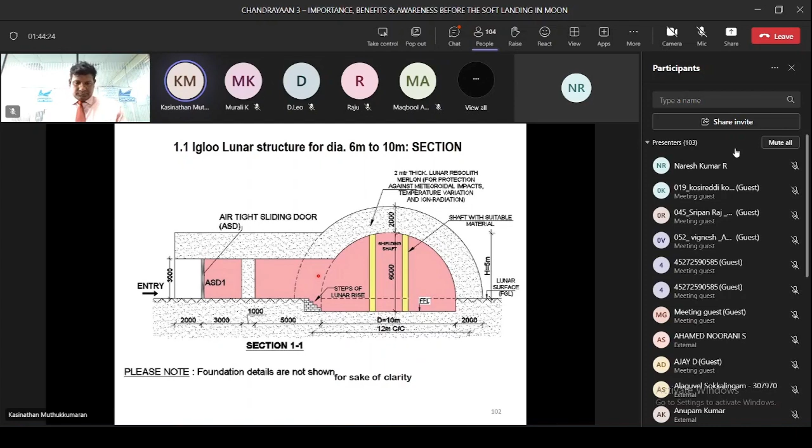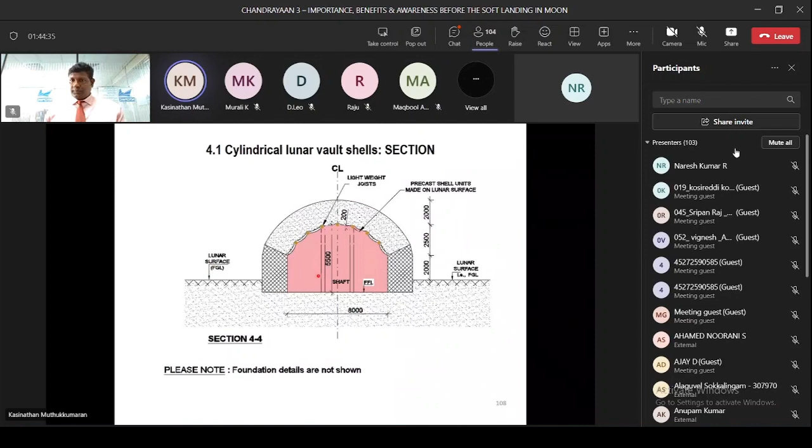So based on this conceptual design, we carried out an analysis considering the uplift pressure, keeping a minimum atmospheric pressure of 100 kPa. For that 100 kPa, with an identified structure of particular dimensions, we modeled the expected uplift pressure, converted it into model scale, and performed a model scale analysis in the laboratory, estimating uplift capacity in terms of two different aspects.

One is a lunar pile, the other is a lunar pile connected to anchors. When using the lunar pile alone, the depth of the lunar pile effect is much larger, where considering a larger depth of lunar pile is practically...

So Muthukumar, we can't hear you.

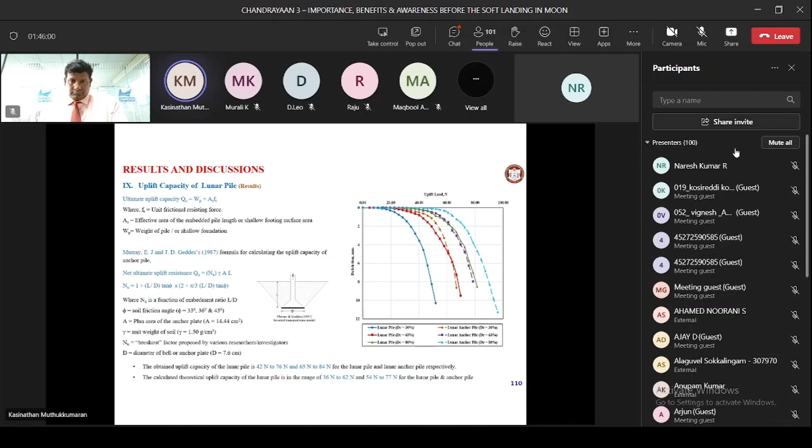This is the experimental results with respect to the lunar piles. Here you can see the complete analysis with respect to various combinations of structures, considering various lunar structures, and the corresponding uplift capacity.

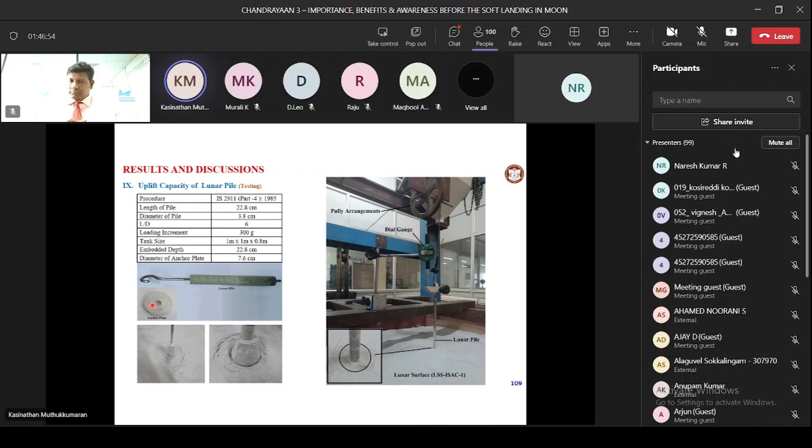In order to get this uplift capacity, we decided how much lunar pile length and lunar plate anchor is needed. These are all the lunar pile and lunar anchor plate, used based on the in-situ resources material. The same simulant is mixed with sulfur, where the sulfur is melted at high temperature, which is possible on the lunar surface due to the elevated surface temperature. This simple solidifying procedure, a sintering procedure, will lead to a solidified concrete-like structure using the in-situ resources of the moon.

So these are the capacities: the required sulfur content and how much compressive strength we are getting. Based on this compressive strength, you can select what will be the required foundation size for the lunar structure.

Based on the developed simulant, ISRO conducted the actual study of lander stability and lunar mobility in the ISRO laboratory. This setup is very simple and easy. Compared to the setup NASA has, which is several times more costly, ISRO's is much cheaper. So there are two.

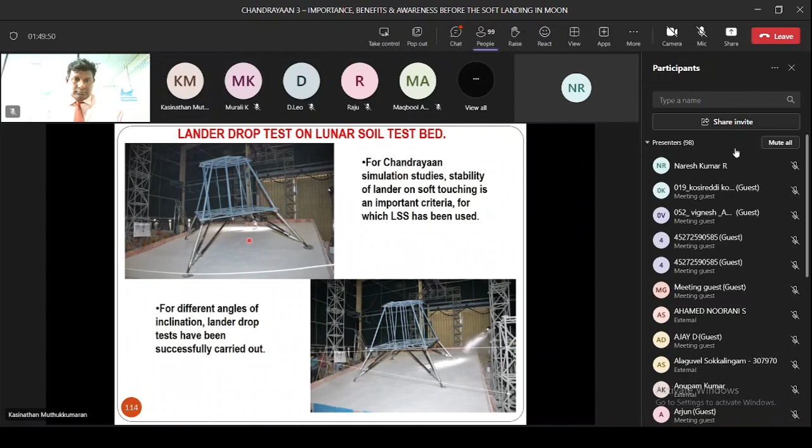In order to simulate the extreme surface conditions the lander or rover may encounter, such as boulders and craters, a model scale study was conducted in the laboratory to look at the drop height, the actual drop height.

The modeled drop height corresponds to the actual lander stability. The lander is dropped to a certain height in order to assess stability, for instance if one leg falls on a boulder, and what kind of stability is required for the other legs when supporting on loose or soft landing sites.

This is typically what ISRO has done, based on the similar setup we developed, the LSS ISAC one. ISRO conducted all possible tests in the ISRO laboratory, and based on this systematic lander and rover stability analysis, the rover and lander were finally designed for the Chandrayaan 3 mission.

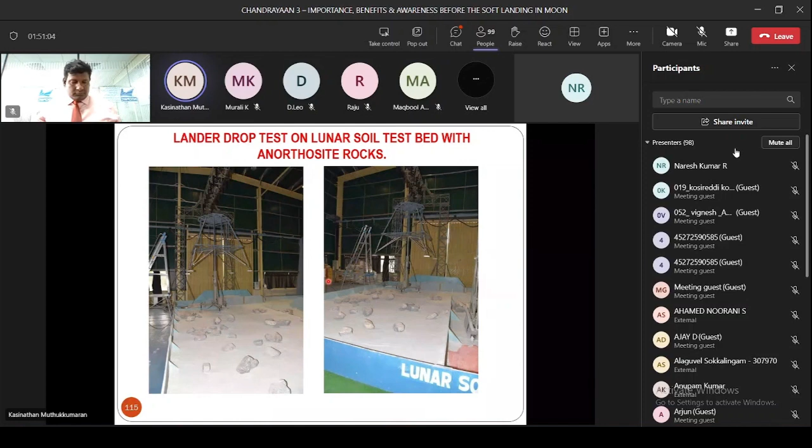Of course, these tests were conducted for Chandrayaan-2 also. So with that, I have come to the end of this project discussion. Basically, this is our ISRO RESPOND project, part of our RESPOND research work. The title of the project is Development of Lunar Soil Simulant for Evaluating the Design Criteria of Lunar Structures.

I would like to thank all these members: the ISRO RESPOND team, the current ISRO director, the URSC director, and the past director, and team members Dr. Venugopal, Director LEOS Dr. K.V. Sriram, and Professor Anbazhagan and his team from the university. Meticulously, they did the LSS simulant - identifying the location, the gradation, pulverization - all was done by this team. And these are the team members involved in this project: Dr. Prabhu and Mr. Pisaga.

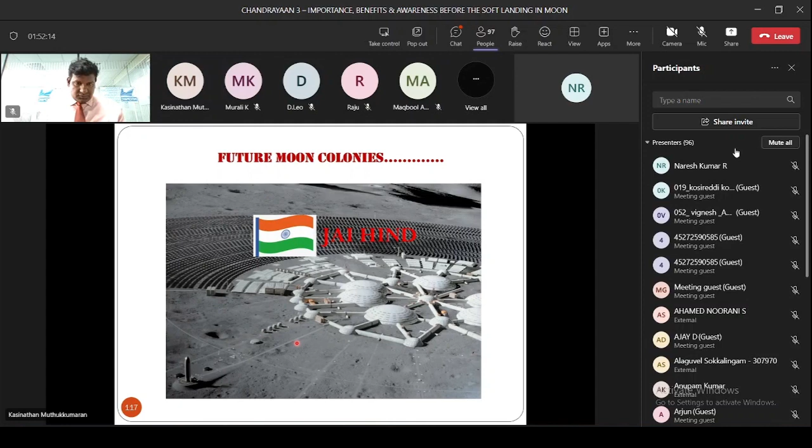So in future, moon colonization will happen, and India will be the pioneer in that area. Hopefully, after a few decades, we may be able to see such moon colonization on the moon. With that, I conclude my talk.

Thank you. I'm sorry I rushed through my slides a bit because I had more than 100 slides. I wanted to show everything we did in the last 13 years related to the lunar soil simulant and lunar structures. If you have any questions, I'm happy to answer.